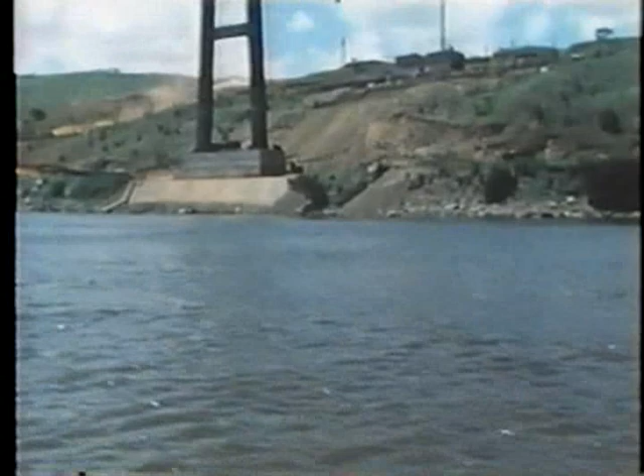Equatorial Africa. A huge river flows across a vast stretch of savanna and tropical rainforests. The Republic of Zaire lies on both sides of this river. People here will soon see a gigantic suspension bridge, constructed for the first time in Africa.

The Republic of Zaire lies in the central part of the African continent, spreading on both sides of the equator over a space area of about 2,340,000 square kilometers. But its coastal lines extend only 30 kilometers on the Atlantic side, with its inland area spreading far inside the continent. In terms of land space, Zaire is one of the largest countries in Africa.

Through the colonial times, as the Belgian Congo, this country became independent in 1960 and in 1971 was renamed as the Republic of Zaire. The whole nation today are exerting themselves to achieve economic independence and modernization all by themselves. Kinshasa, the capital and the largest city of the country, holds nearly 10% of the national population of about 26 million.

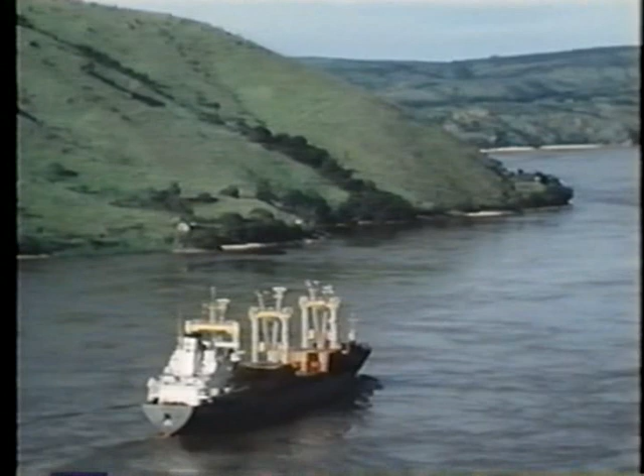However, traffic and transport systems are not well organized yet. Transport of mineral resources yielded in the central and southeastern areas is done by means of its railways operated on a modest scale and boats navigating up and down the Zaire River and its tributaries.

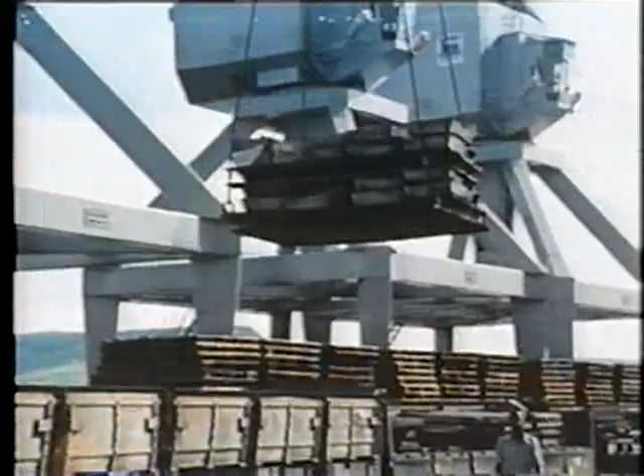The port of Matadi, about 150 kilometers upstream of the Zaire River from the Atlantic Ocean, functions as the country's trade center, but considerable amounts of losses are inevitable in terms of time consumed and economy, so long as the goods in transport are transferred from the railways to the ship or the other way round. In fact, nearly all of the mineral products accounting for most of the earnings in foreign currency are shipped for export through the neighboring countries.

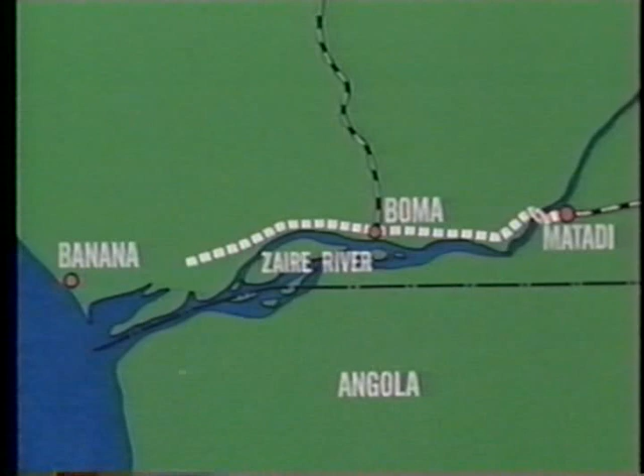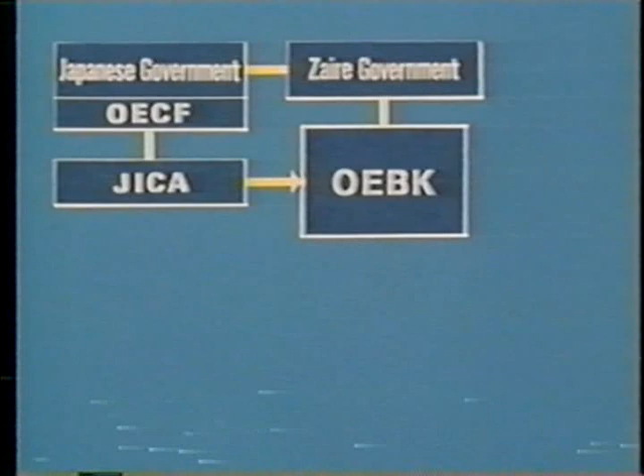The Japanese government dispatched bridge construction experts to the OEBK, l'Organisation pour l'équipement de Banana-Kinshasa, which is under the direct control of the Zaire government. A Japanese consortium won the order for bridge construction. This consortium consists of Ishikawajima-Harima Heavy Industries Limited, Mitsubishi Heavy Industries Limited, and Kawasaki Heavy Industries Limited. The consortium took charge of everything: investigation and designs of the overall construction work, the construction of substructures, the fabrication and installation of the superstructures, roadway construction, etc.

The new bridge is to be a suspension type for combined use of railways and roadways. In coping with the demanding tasks for specific and highly sophisticated bridge construction techniques, a technical committee was organized, consisting of leading figures in the Japanese bridge construction engineering, who provided technical advice. To construct a suspension bridge incorporating the best of bridge construction technology, the consortium made continuous studies and repeated discussions on various aspects involving surveys and investigations, designs, construction, etc.

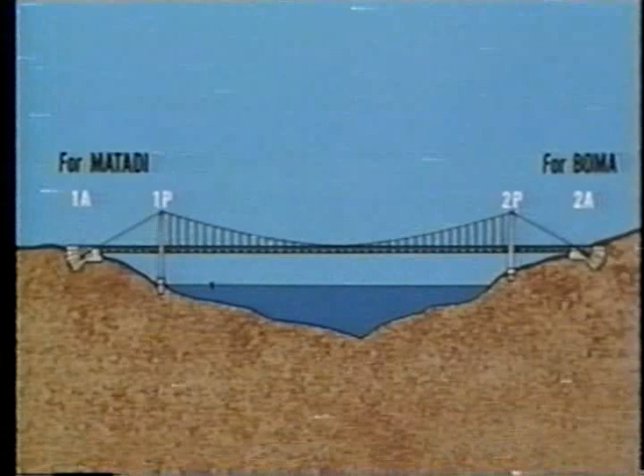The bridge should be a 3-span continuous truss stiffened suspension bridge without suspending the side spans, with the central span measuring 520 meters and the side span 101 meters, to make up the total length of 722 meters. The upper surface of the stiffening truss is used for the roadway and the lower surface for the railway. The structure is carefully designed for economy and shortening of the work period, such as the composition of the main truss and the steel deck.

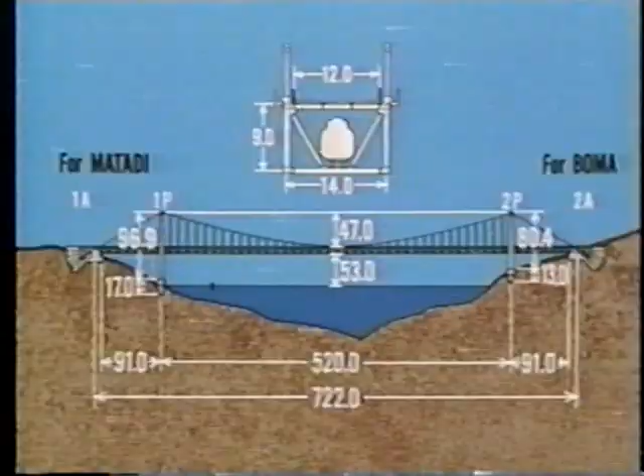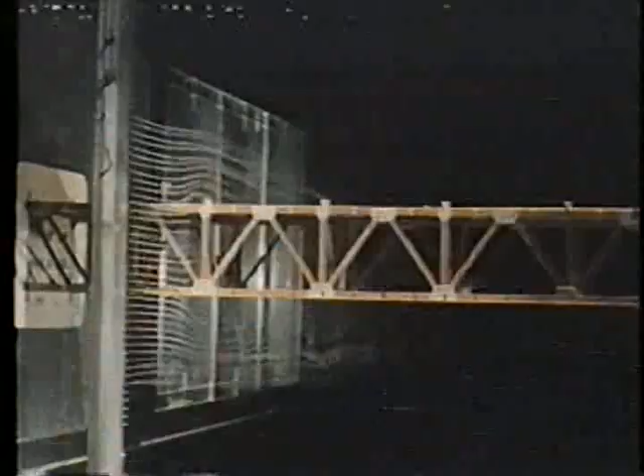In the fabrication and installation, several investigations and tests were conducted to clarify characteristics about aerodynamic stability and conditions of train running. A wind tunnel test is one of the examples. Studies on aerodynamic stability and the train running conditions help us confirm the appropriateness of the type of suspension bridge and the basic design. The technological achievement involving this bridge, designed for combined use for the railway and roadway, will provide us worldwide with invaluable data for tomorrow's bridge construction technology.

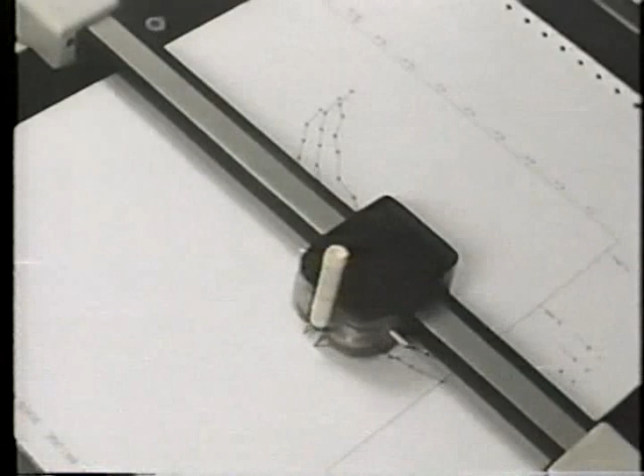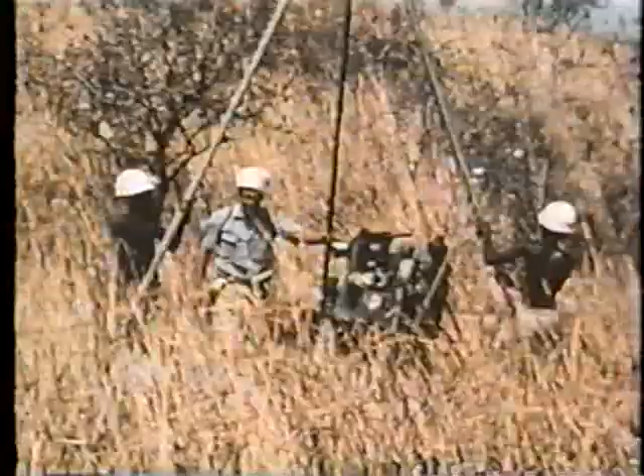This is the construction site of the bridge viewed from the city of Matadi in the year the work was started. Here, attracting our attention, is the narrowest part of the river, where steep cliff-like hills fall, so to speak, down to the riversides. Now we begin with detailed studies of geology. Based on the studies made, the designing of the bridge and the foundations and the access road proceeds with increasingly clear-cut details.

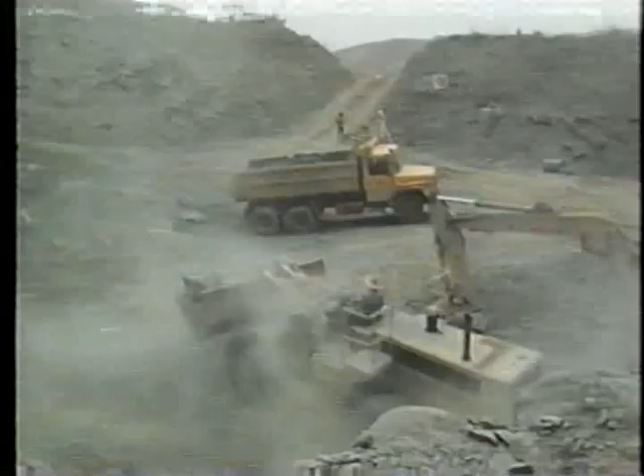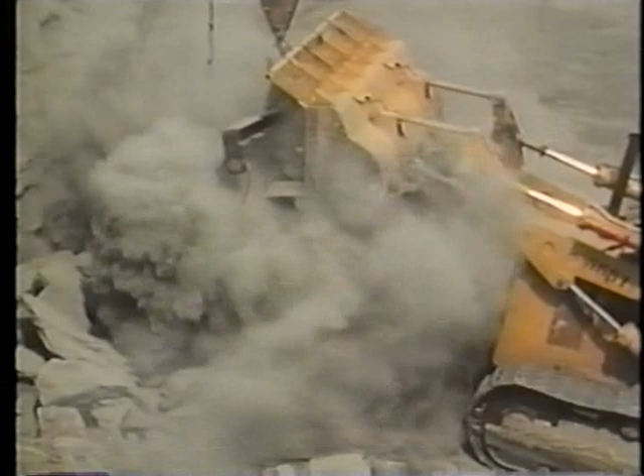Excavation has started around the hill where the anchorages are to be constructed. Here, seen under the weathered layer of earth, is a hard rock bed to support the bridge. This is the Precambrian rock layer, considered to be 500 million years old. The anchorages have been designed basically to be a gravity-type direct foundation structure, supported by this hard rock bed.

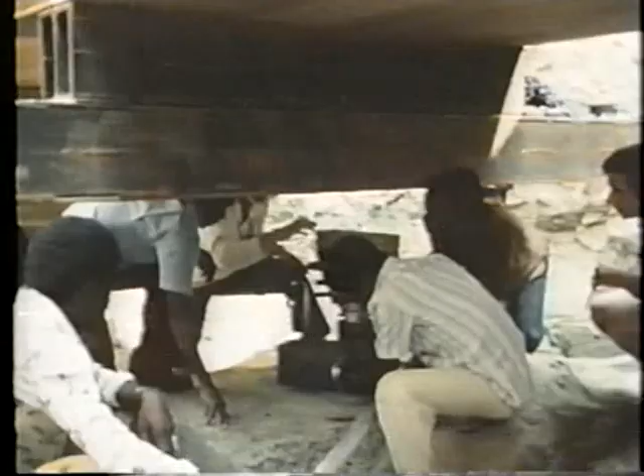A couple of foundations in each pier with an 8-meter diameter are to be constructed by means of the deep foundation method. The loading test of the supporting rock bed. The test helps us to confirm that the hard earth layers have sufficient strength as a supporting ground for the huge suspension bridge.

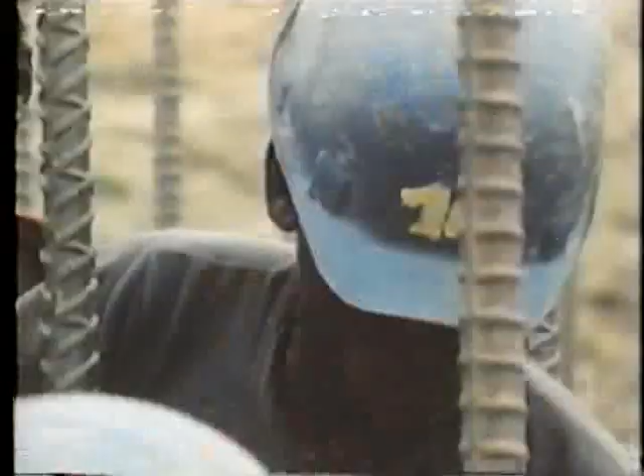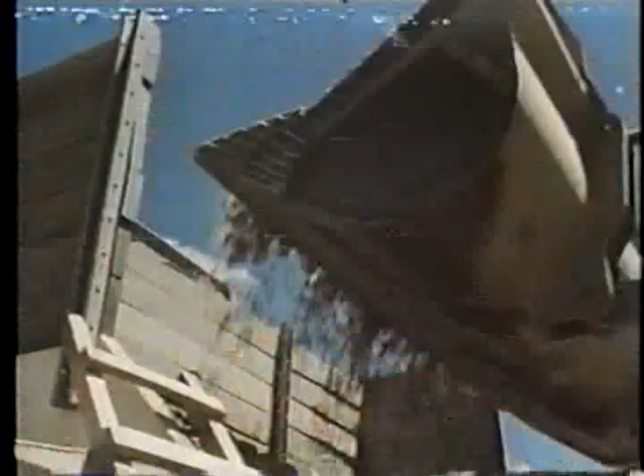Pouring for pier foundations is proceeding as planned. A large number of Zaire people have been employed to deal with the substructure construction, providing significant labor force. Aggregates for concrete were quarried in the rocky hills nearby, and batcher plants built at the work site to ensure stable supply of massive concrete.

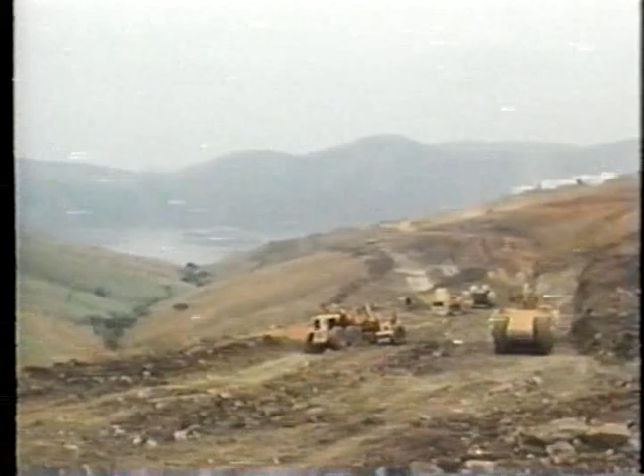While the substructure work was progressing, reclamation work for the access road went on smoothly by excavating part of the hill. In the highlight of the substructure construction, President Mobutu visited the work site. Standing in the middle of the bridge construction site, the President observed the progress of the construction work. The entire nation is anxiously awaiting the completion of the bridge with great expectation.

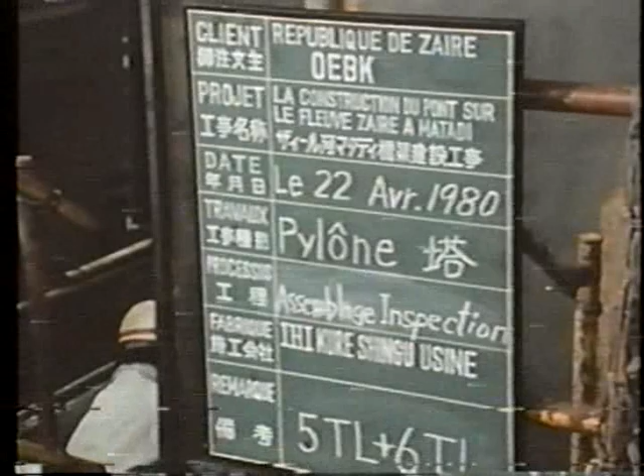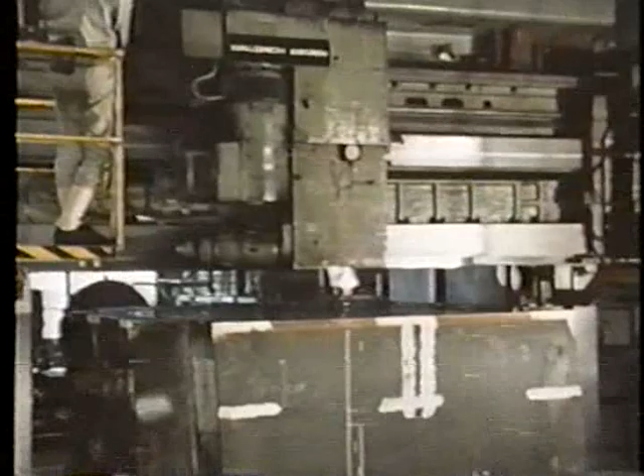In Japan, the fabrication of bridge superstructures was proceeding smoothly. The three companies in the consortium have the most up-to-date specialized works for the manufacture of large steel structures, as well as capable engineers and skilled workers who rank among the world's best. In the trial assembly of the main tower, the metal touching of the blocks proved far better than 90% of tightness rate. Precise facing of the tower base bottom plate surface is followed by machining each end of the truss members.

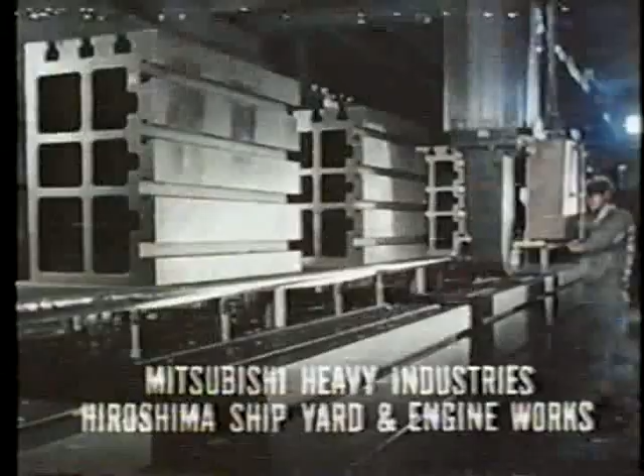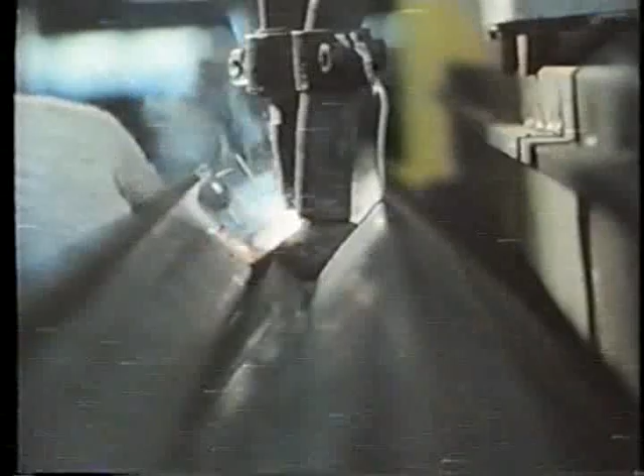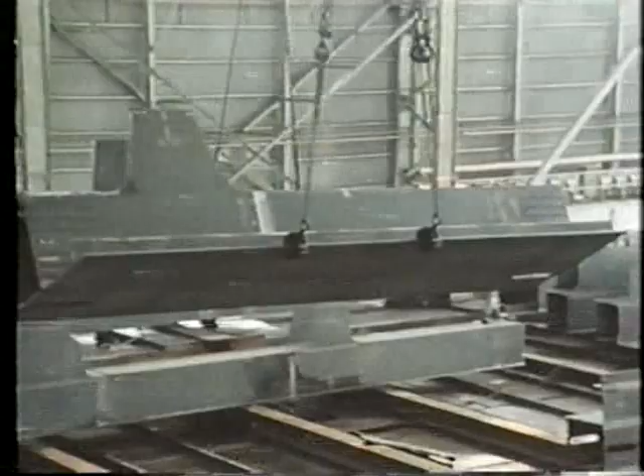The adoption of high tensile steel for this bridge requires particularly stringent quality control in welding. For that reason, tests for execution of welding were carried out to find out the best welding method, which then was applied to the actual welding. Each factory keeps assembly precision of structure members under rigorous quality control, taking advantage of their accumulated know-how in bridge construction.

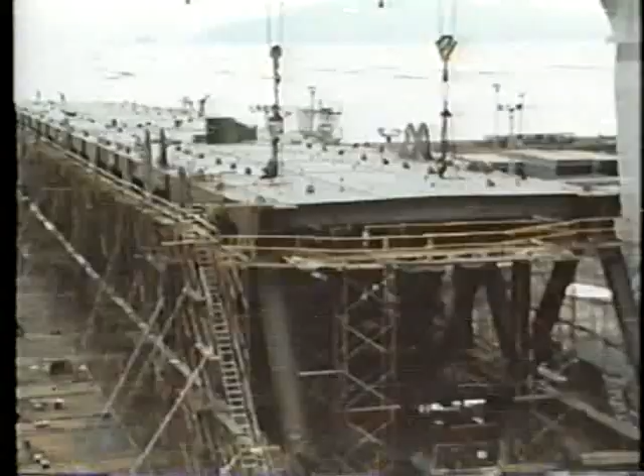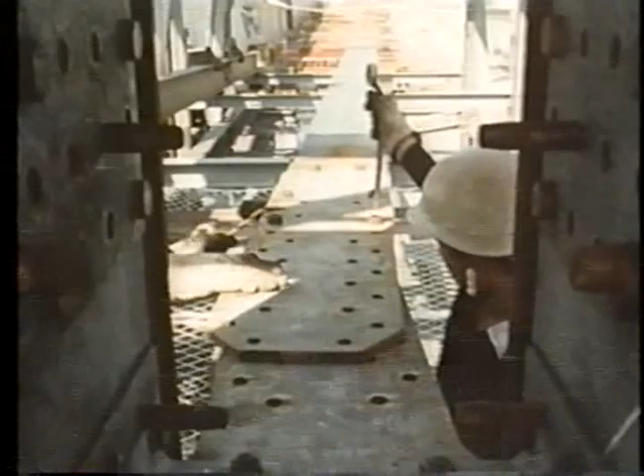This is a three-dimensional trial truss assembly incorporating the steel deck. The anchor frames are also assembled temporarily in full scale for erection. Assembly precision is pursued to the extreme until the slightest of error has been corrected. The bridge structure members, just completed by the three-company consortium, are now being shipped to Africa.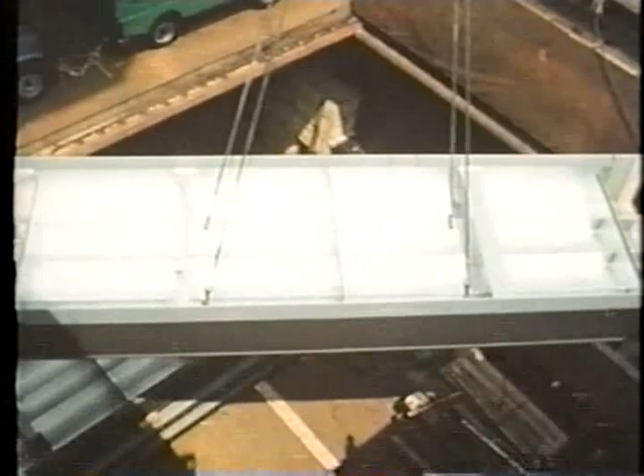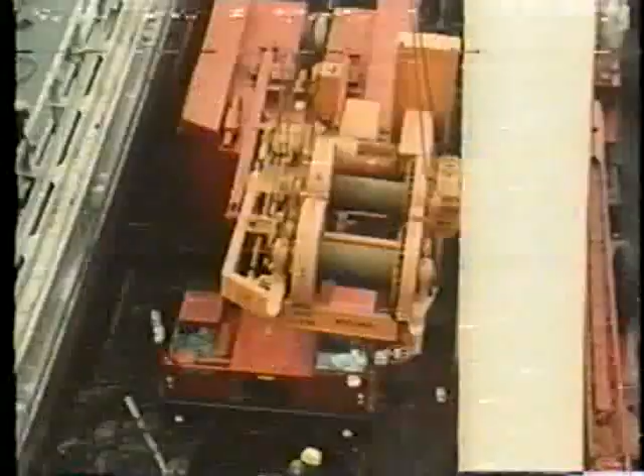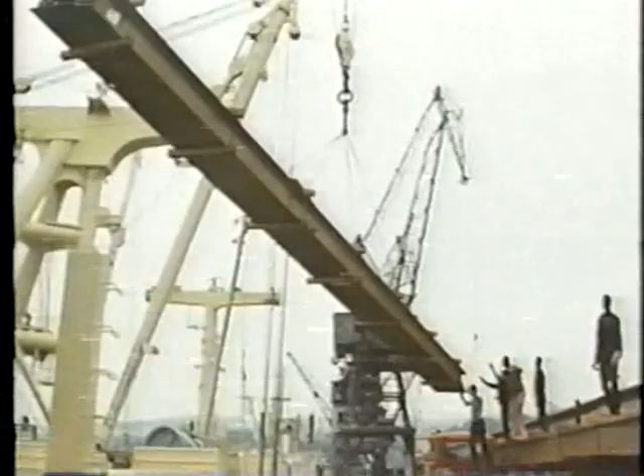It's about 20,000 kilometers from Japan to the African port city, sailing through the Malacca Straits, then across the Indian Ocean, and round the Cape of Good Hope into the Atlantic Ocean. It's about a month since the freighter left Japan. Now it has sailed along the Zaire River, passing by the bridge construction site to arrive at the Matadi port. A number of heavy machines and structure members are unloaded one by one. Temporary facilities to be installed at the work site, machinery and bridge members, including superstructure components, are all transported from Japan.

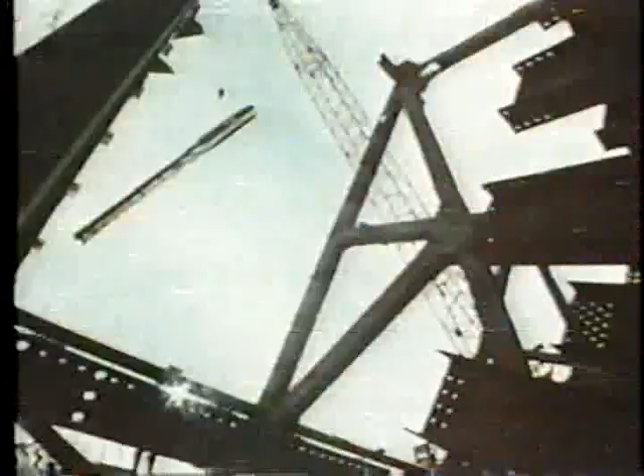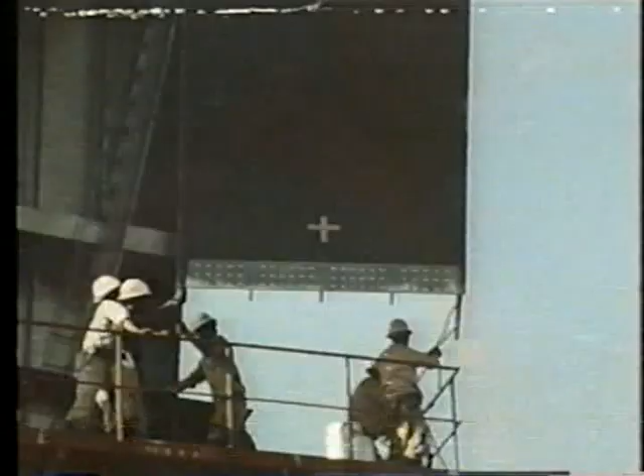The erection of the superstructure has just begun. The anchor frames for cable fixing are assembled into the concrete anchorages. Here, the main tower is erected. For an economical reason, the main tower is partitioned into 11 in the height direction with a cross-sectional structure consisting of 4 panels.

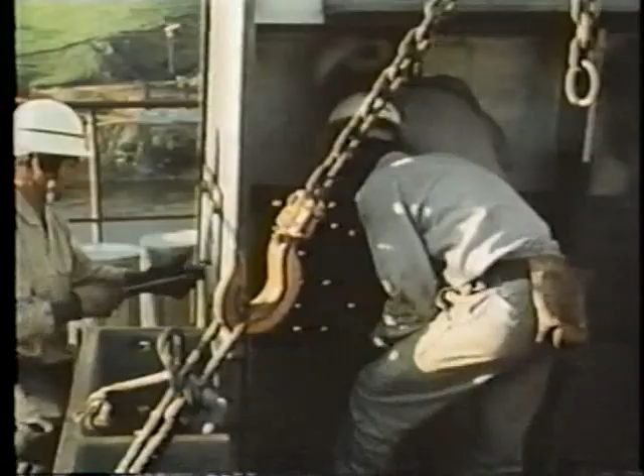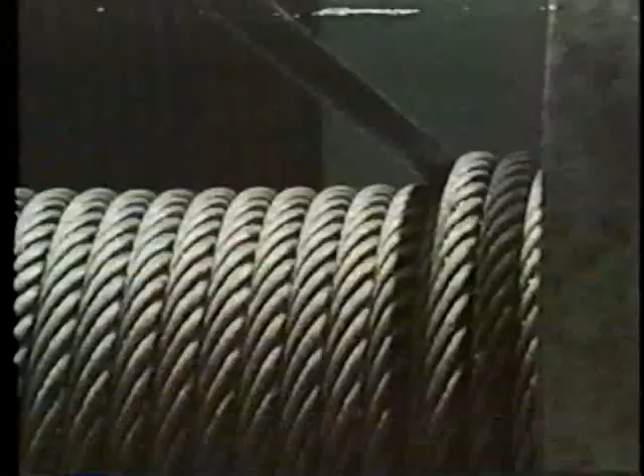The adoption of the lift-up crane method, newly devised for the tower erection, is a new departure from the conventional method. In this method, the crane placed on the tower deep beam, finally installed as the tower top horizontal beam, helps to erect the main tower each time after winding up the beam with a winch. This minimizes installing facilities, contributing to the economy and stability of the bridge construction, an excellent method indeed. In this way, the main tower can be erected firmly high above the ground.

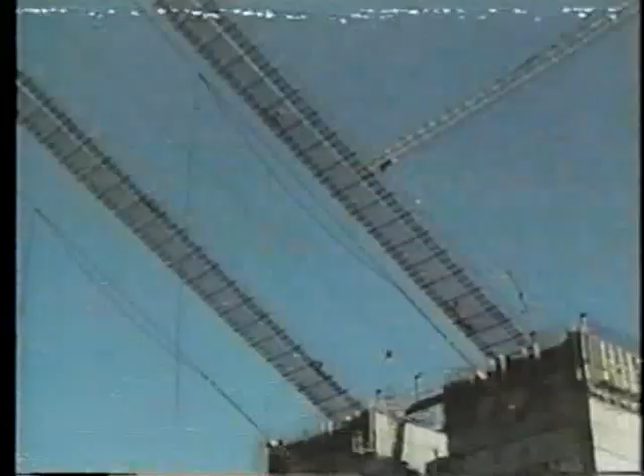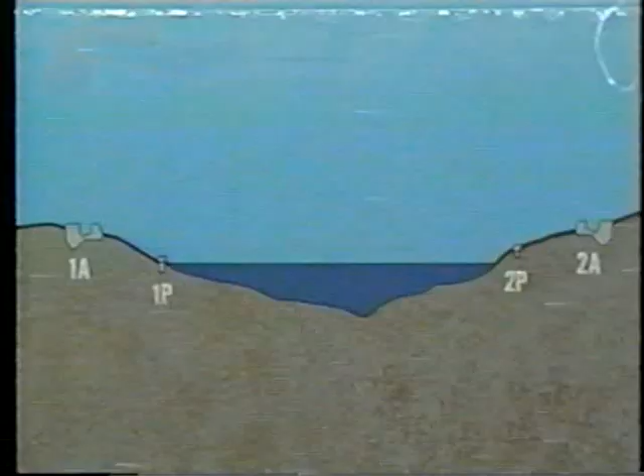Two years after the construction start, the construction work has progressed to the erection of cables, linking the 2 towers and the anchorages on both banks. In the air, scaffoldings called catwalks are prepared crossing high above the Zaire River. The erection of cables begins with the stretching and spanning of a pilot rope. To prevent the rope from being caught by the swift current, it is drawn out by a tugboat which keeps it hung in the air. Then a temporary hauling rope is stretched, making use of the pilot rope just installed.

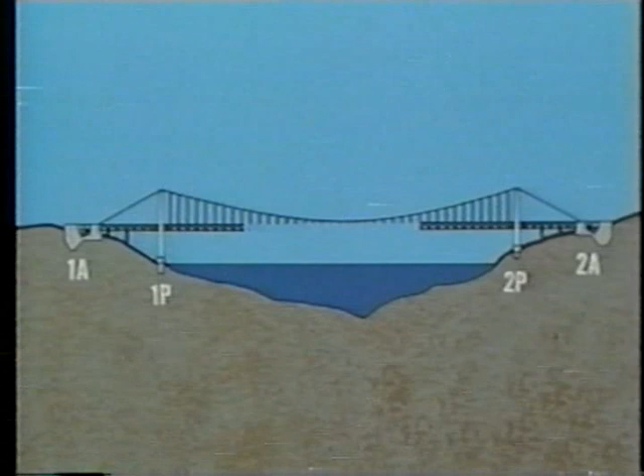This is followed by the erection of the catwalk, which is stabilized with storm ropes, and then the hauling ropes are fixed. Individual parallel wire strands are pulled out one by one above the catwalk, and then are finished into a round cable with a diameter of 480 millimeters. At the central span, hanger ropes are suspended, and erection stiffening trusses follow. A single strand of the cable consists of 127 wires bundled together, each having a diameter of 5.15 millimeters.

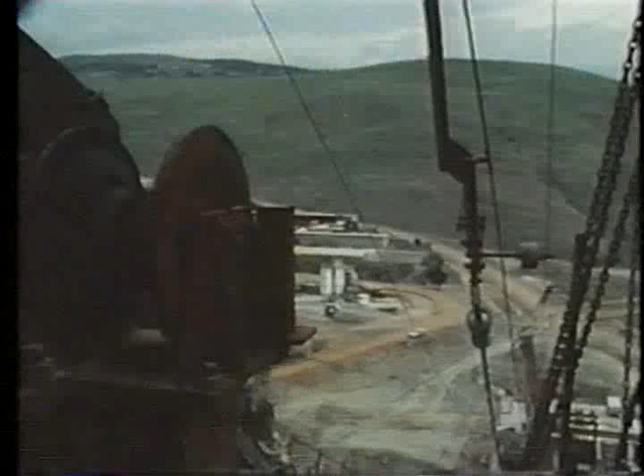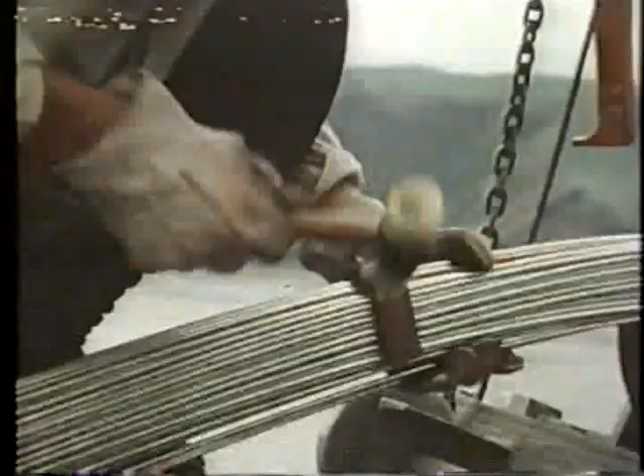The erection of cables is the highlight of suspension bridge construction. Every care has been taken before the actual construction at the site, using full-scale models for installation tests in Japan. After the strands have been made into a desired shape above the catwalk, it is transferred to the saddle. The pulling of strands is individually repeated 56 times on either side of the bridge. The locations installing strands are simultaneously shown on the indicator panel set at the construction site base.

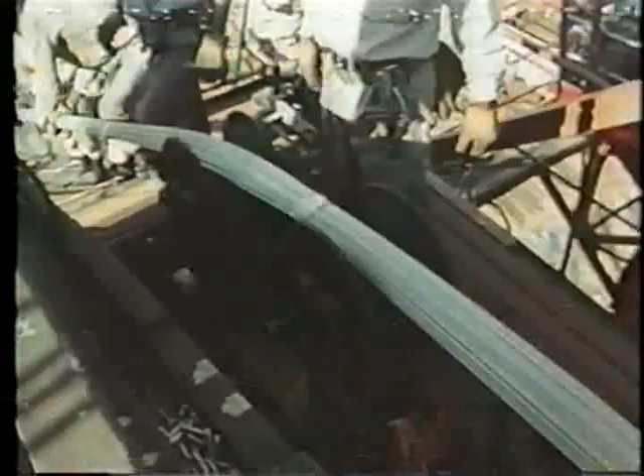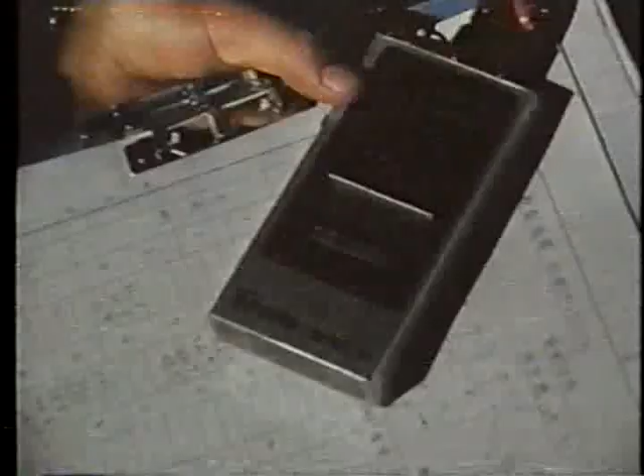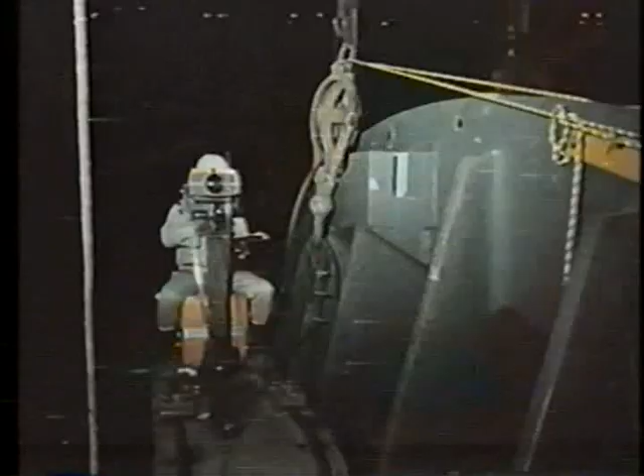Under thoroughgoing control, the strands are pulled across the tower top over the river down to the anchor frame where the cables are to be attached. Sag adjustment is carried out during the night when temperature changes are usually decreased. Each sag is adjusted conforming to the standard strand. The strand, which has been drawn to the anchor frames, is now firmly fixed.

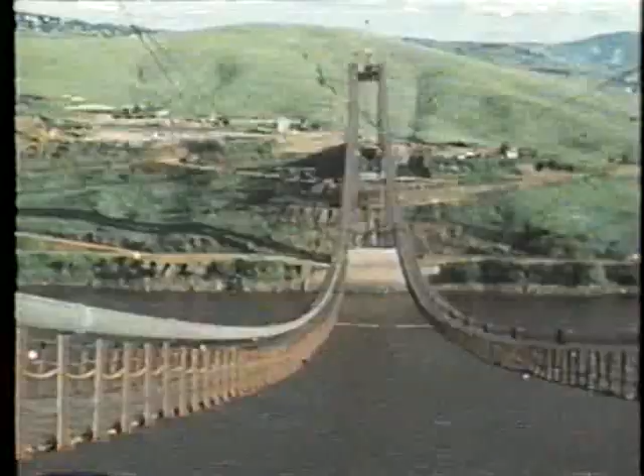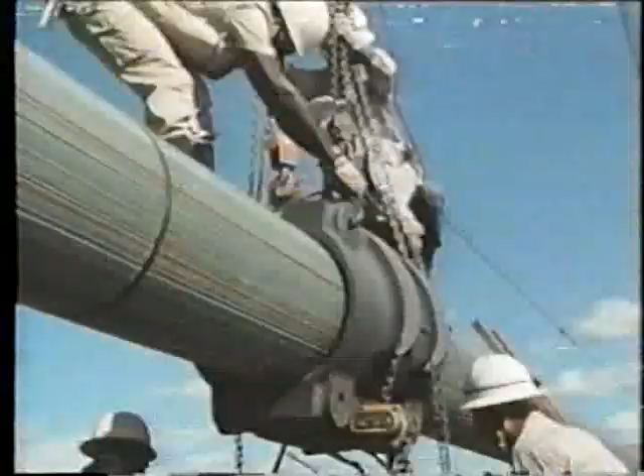In this way, the installation work of the cables, the lifeline of a suspension bridge, proceeds to its final stage. Now cable bands are clamped around the cable, which has been completed in round shape. After this, hanger ropes are hung down at the central span prior to the attachment of stiffening trusses.

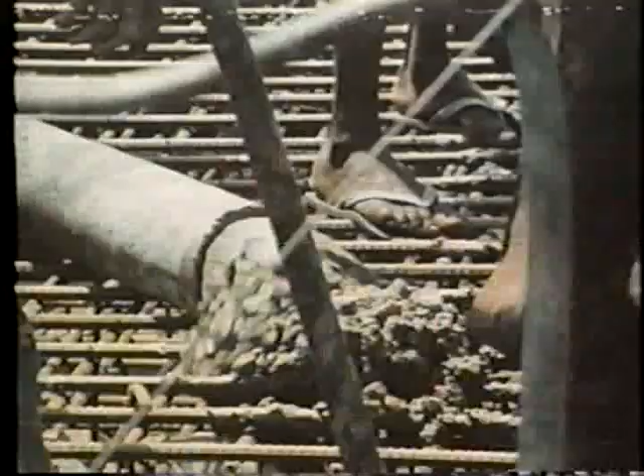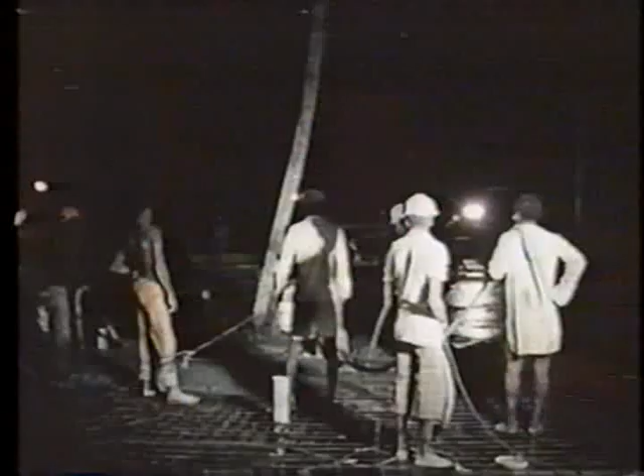Meanwhile, the anchorages where the cables are attached are ready for concrete pouring. In the substructure construction, mass pouring of concrete has been carried out using about 25,000 cubic meters per anchorage. When huge amounts of concrete are poured at one time, considerable heat is usually produced, providing a possibility of making cracks in the concrete. To prevent this, concrete pouring has gradually been done, dividing into 105 separate blocks.

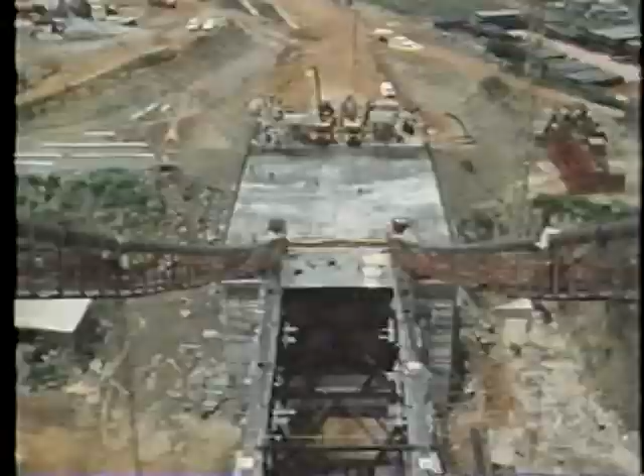The Boma side road makes a sharp turn to the right, where the bridge foundation is to be constructed, and requires excavation of a steep slope, a job attended with a great deal of engineering difficulties. The work, however, is rapidly proceeding.

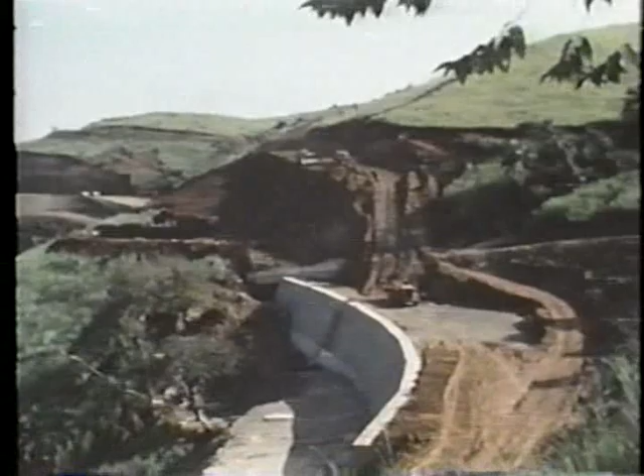Under the cables, the erection of stiffening trusses has started. The side span trusses have been completed by the bent-used method. The top chord, bottom chord, and diagonal structure members are all installed member by member, fastened with torque shear type high-strength bolts.

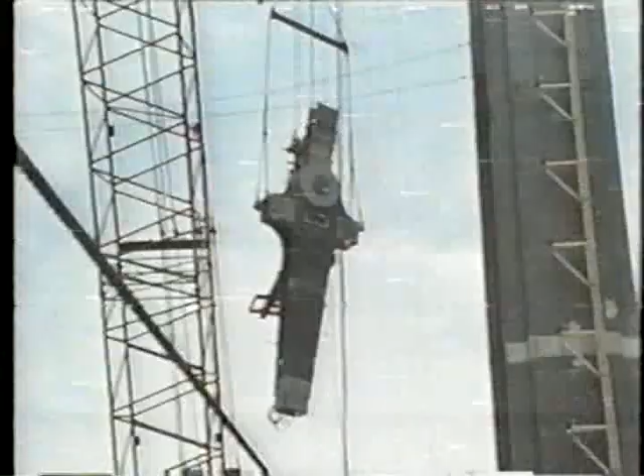Underway parallel to the side span erection is the erection of tower links, which function as intermediate supports of the stiffening trusses. The construction work will soon be faced with the rainy season. Fortunately, however, the work has hardly been hampered by the unfavorable weather.

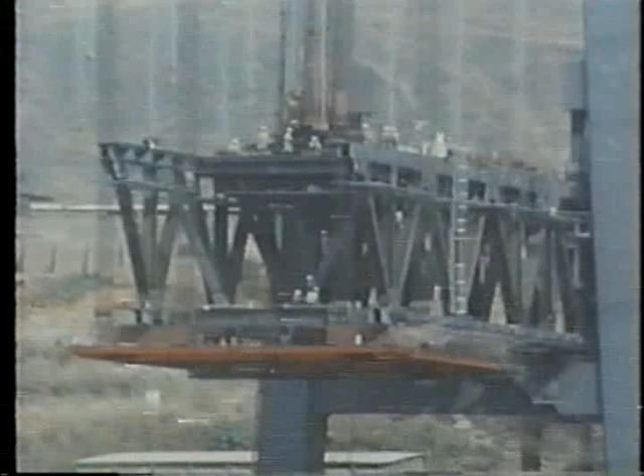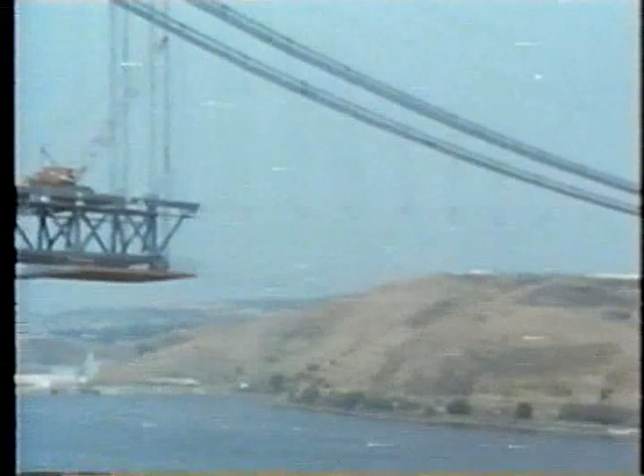The design, with due consideration made on erection, has been drawn out to let the superstructure and the substructure works progress in parallel. Machines and equipment, as well as personnel arrangement, have been effectively made. In addition, the work period has successfully been shortened by more than a year, thanks to the enthusiastic cooperation of people in Zaire who have long wished for the completion of the bridge.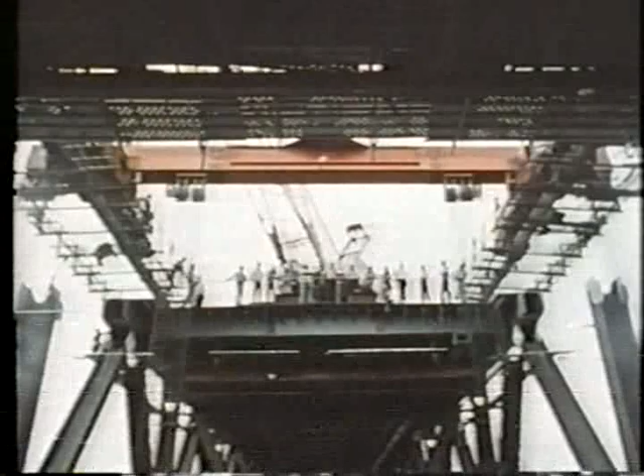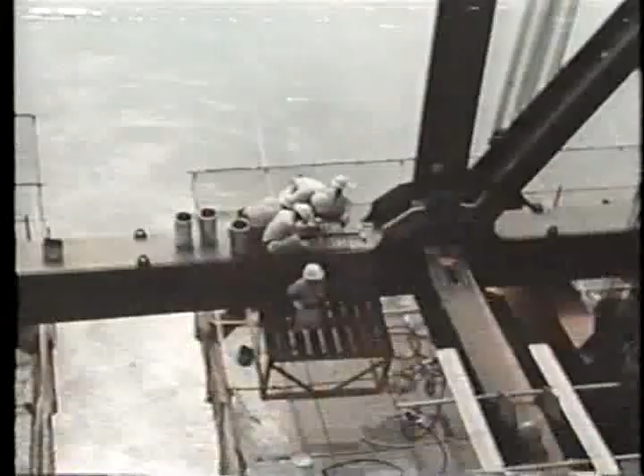Prior to the stiffening truss closing work, one of the members of the technical committee makes an inspection at the site. Now the last stiffening truss member is fitted in, finally linking up both banks. First, the bottom chord is firmly connected. The top chord is placed in position with great accuracy.

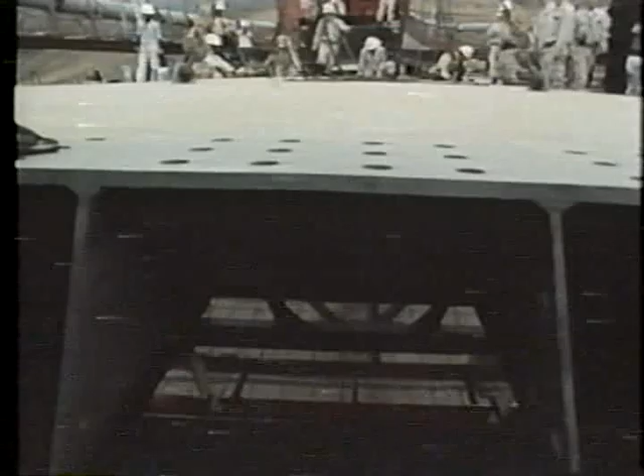People now wait for the dramatic moment of closing work on the final stage, each reminiscent of the memorable scenes of the work he has been responsible for. Finally, the steel deck is set in position, filling the space above the river. The completion of carefully planned operations for bridge construction.

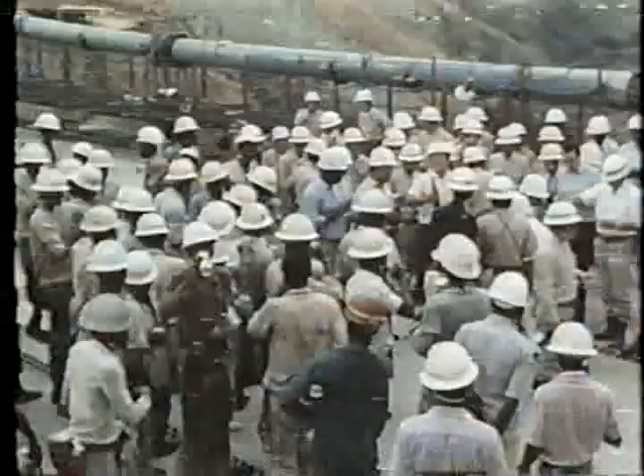The superior technical capabilities of the three-company consortium, and the devoted endeavors exerted by the Zaire employees. With all these put together, the bridge spanning this magnificent river, the Zaire, will soon be completed, symbolizing the efforts of all concerned. The work still continues towards the finish.

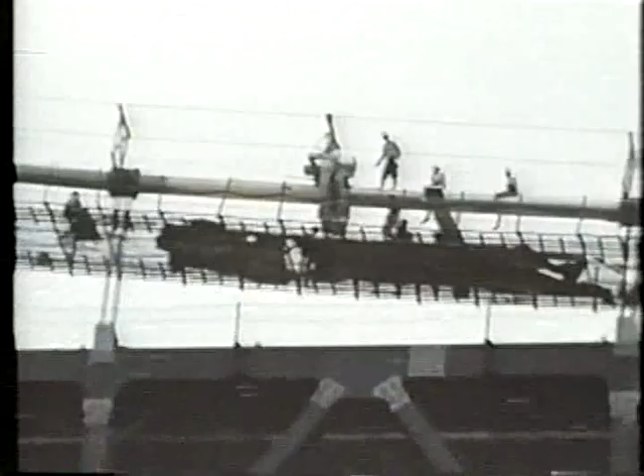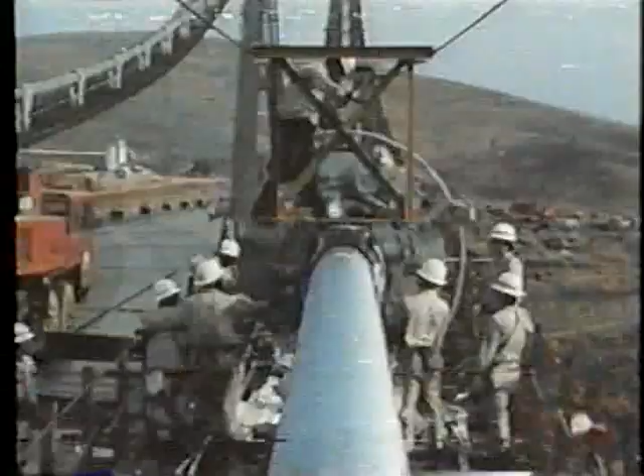Cable wrapping. The cable with a 480 millimeter diameter is being shaped into complete form. For protective treatment, only the finishing coat is done at the construction site. Here, the employed Zaire people are having technical training led by Japanese engineers. Steadily underway here is the paving work of the access roadway that extends in total 8 kilometers on both sides of the river.

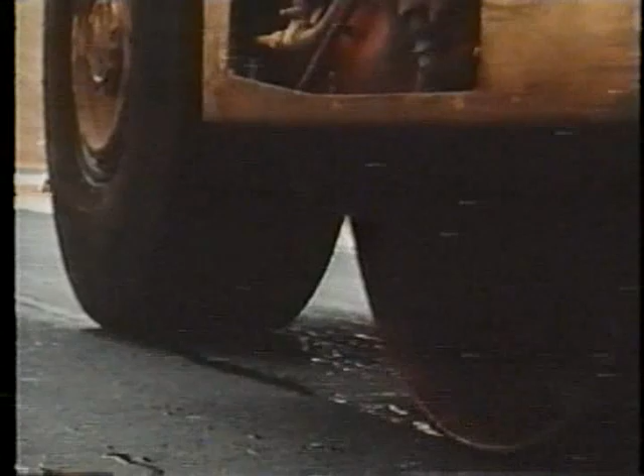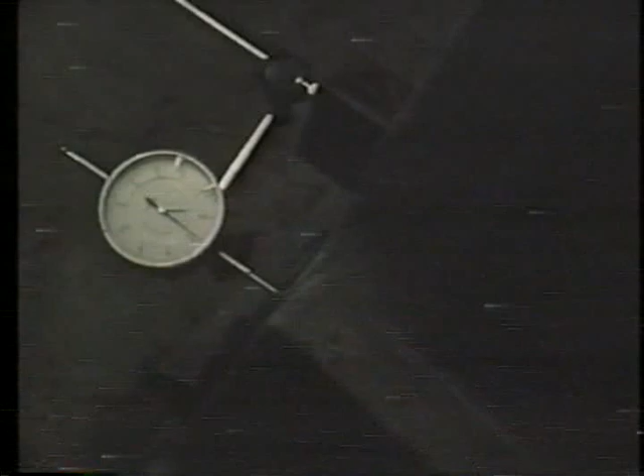A loading test is conducted from midnight towards dawn, when the operation and the test results are least affected by temperature changes. Now the bridge is going to hold a maximum load of 750 tons. The loading test has resulted in the confirmation that the design has been correct and the work execution excellent.

Here, the huge suspension bridge spans the Zaire River, demonstrating the advanced technology of bridge construction. The city of Matadi, seen behind the river. Traffic between both sides here accounts for 10,000 people and 300 cars per day, carried only by this ferry boat, which plies several times a day between both banks, struggling its way through the rapid stream.

We need a bridge here. It's been a long, cherished wish of people in Zaire. And their wish will soon be answered. The 21st of May, 1983. The opening ceremony was delightfully held, inviting President Mobutu.

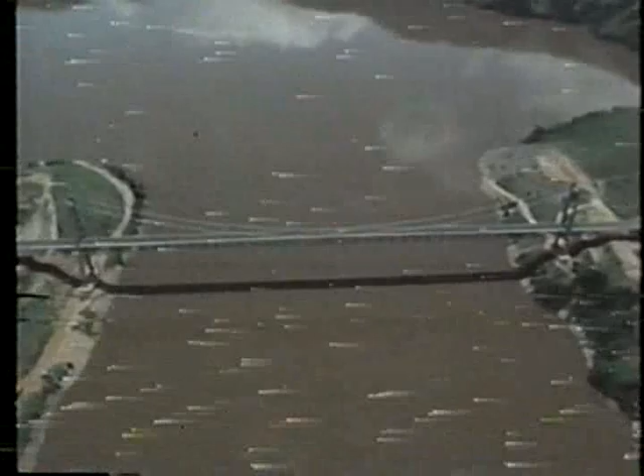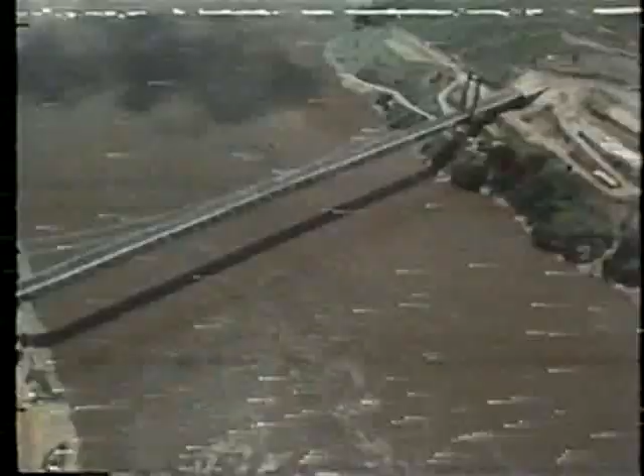Our bridge-building technology has brought about memorable achievements in Africa in the form of a gigantic suspension bridge spanning this impressive river, the Zaire.